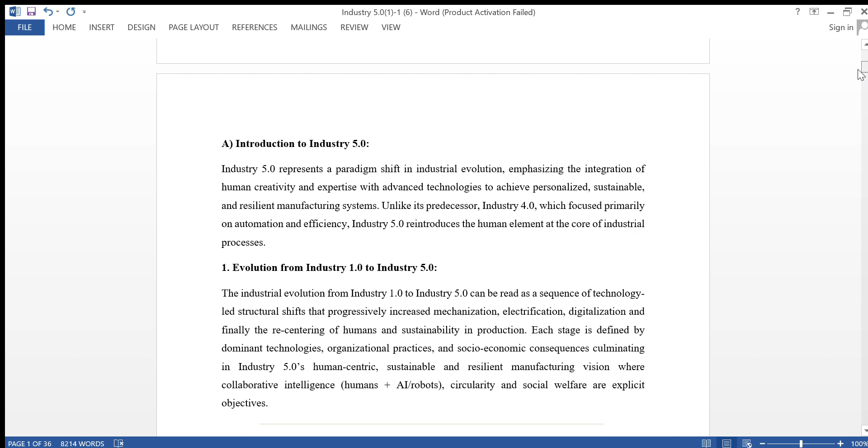What is Introduction to Industry 5.0? Industry 5.0 represents a paradigm shift in industrial evolution, emphasizing the integration of human creativity and expertise with advanced technologies to achieve personalized, sustainable, and resilient manufacturing systems. Unlike its predecessor, Industry 4.0, which focused primarily on automation and efficiency, Industry 5.0 reintroduces the human element at the core of industrial processes.

Evolution from Industry 1.0 to Industry 5.0. The industrial evolution from Industry 1.0 to Industry 5.0 can be read as a sequence of technology-led structural shifts that progressively increased mechanization, electrification, digitalization, and finally the recentering of human and sustainability in production. Each stage is defined by dominant technologies, organizational practices, and socio-economic consequences, culminating in Industry 5.0, a human-centric, sustainable, and resilient manufacturing vision where collaborative intelligence, circularity, and social welfare are explicit objectives.

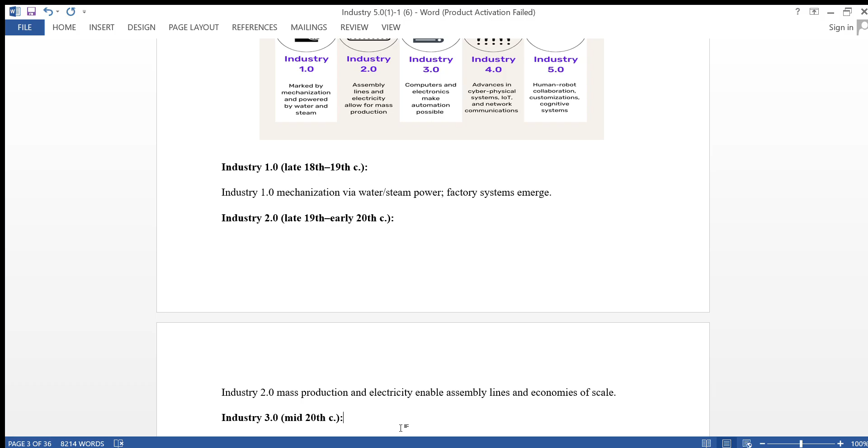Here are the differences from Industry 1.0 to Industry 5.0. Industry 1.0 includes mechanization via water or steam power; the factory system emerges. Industry 2.0 includes mass production, and electricity enables assembly lines and economies of scale. Industry 3.0 brings electronics and programmable logic controllers, bringing automation and digital control.

Industry 4.0: cyber-physical systems (CPS), Internet of Things, big data, cloud computing, and AI enable highly interconnected, data-driven smart factories and value chains. The emphasis is on efficiency, flexibility, and automation.

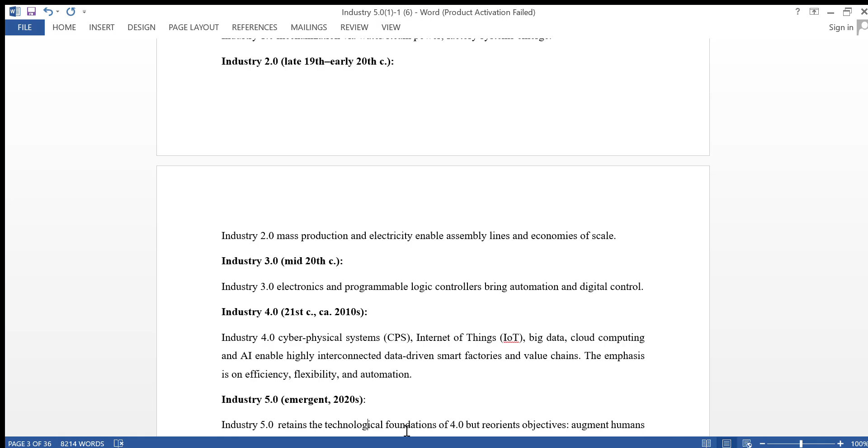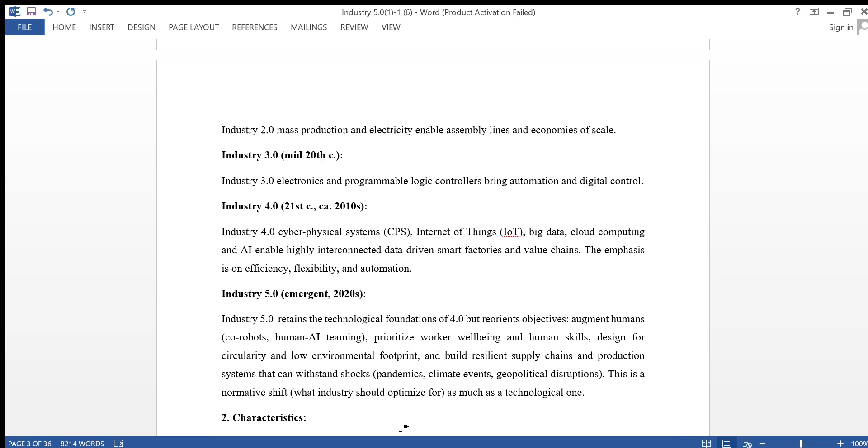Industry 5.0 retains the technological foundation of 4.0 but reorients objectives: augmented humans, prioritizing workers' well-being and human skills; designed for circularity and low environmental footprint; and built resilient supply chains and production systems that can withstand shocks. This is a normative shift as well as a technological one.

Characteristics: Human-centric collaboration. Industry 5.0 promotes a symbiotic relationship between humans and machines, where advanced robotics and AI collaborate with workers to enhance creativity and decision making in the production environment. Sustainability and resilience: the framework emphasizes environmental sustainability and system resilience, integrating technologies like green computing and renewable energy sources to reduce ecological footprint and enhance adaptability in the manufacturing process.

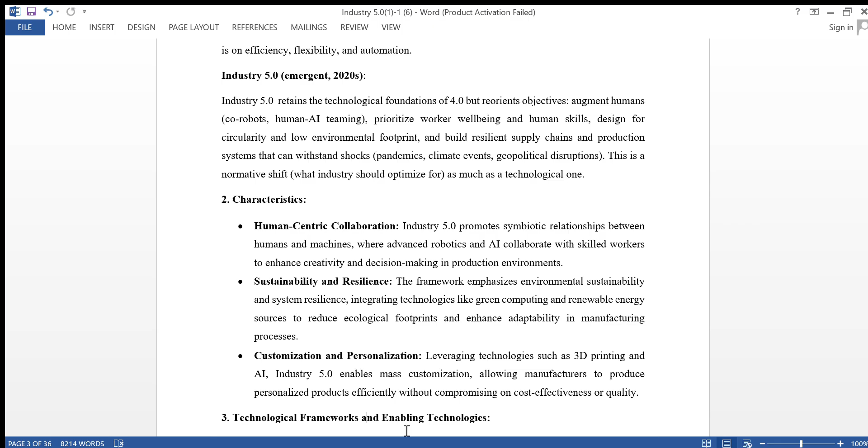Customization and personalization. Leveraging technologies such as 3D printing and AI, Industry 5.0 enables mass customization, allowing manufacturers to produce personalized products efficiently without compromising on cost effectiveness or quality.

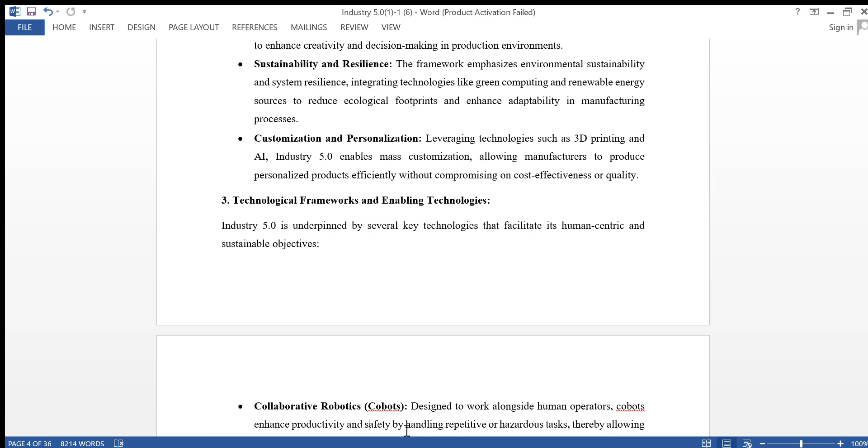Technological framework and enabling technologies. Industry 5.0 is underpinned by several key technologies that facilitate its human-centric and sustainable objectives. Collaborative robots, designed to work alongside human operators, enhance productivity and safety by handling repetitive or hazardous tasks, thereby allowing humans to focus on complex and creative aspects of production.

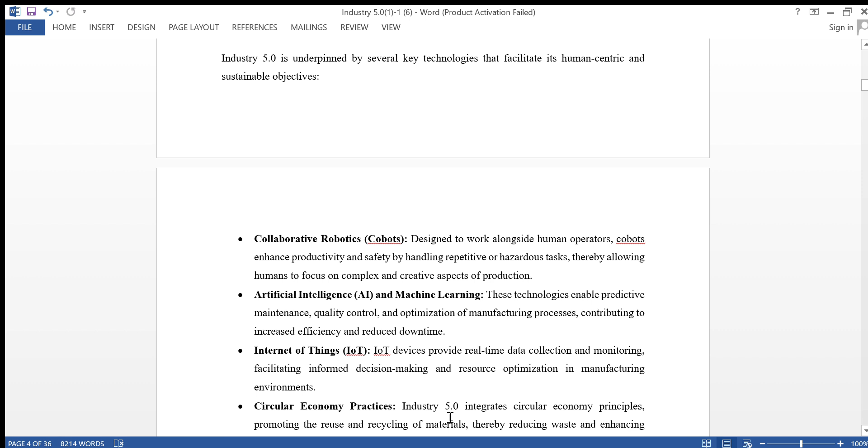Artificial intelligence and machine learning: these technologies enable predictive maintenance, quality control, and optimization of manufacturing processes, contributing to increased efficiency and reduced downtime. Internet of Things (IoT) devices provide real-time data collection and monitoring, facilitating informed decision making and resource optimization in manufacturing environments.

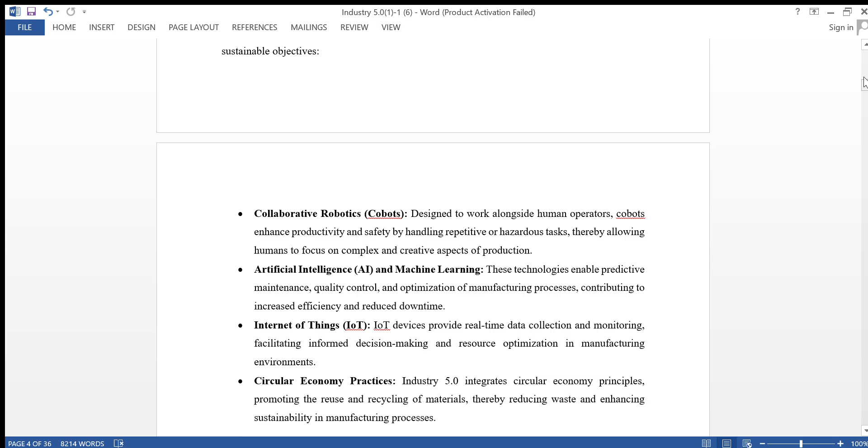Circular economy practices: Industry 5.0 integrates circular economy principles, promoting the reuse and recycling of materials, thereby reducing waste and enhancing sustainability in manufacturing processes. Next, our point is Industry 5.0.

Industry 5.0 differs technically from Industry 4.0. Optimization objective: Industry 4.0 optimizes throughput, agility, and cost. Industry 5.0 optimizes a multi-objective function that includes human well-being, sustainability, and supply chain resilience in addition to productivity. This requires multi-criteria decision frameworks and new KPIs.

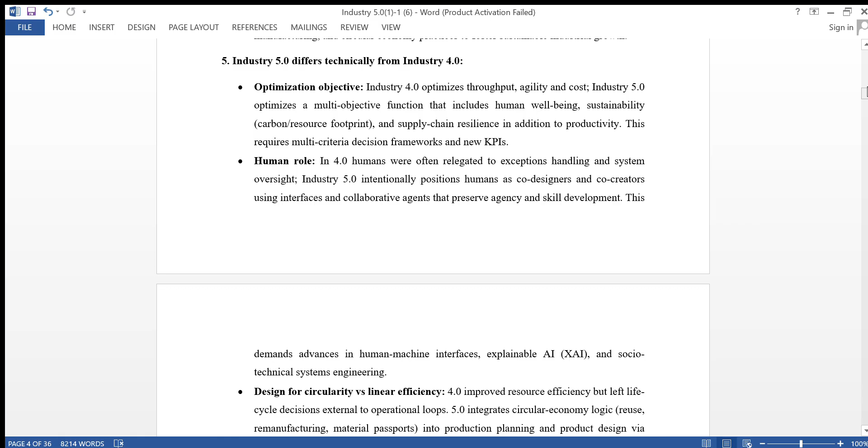Human role: in 4.0, humans were often relegated to exception handling and system oversight. Industry 5.0 intentionally positions humans as co-designers and co-creators, using interfaces and collaborative agents that preserve agency and skill development. This demands advances in human-machine interfaces, explainable AI (XAI), and socio-technical system engineering.

Design for circularity versus linear efficiency. Industry 4.0 improved resource efficiency but left life cycle decisions external to operational loops. Industry 5.0 integrates circular economy logic—reuse, remanufacturing, material passports—into production planning and product design via digital twin and traceability systems. Metrics and governance: Industry 5.0 requires new measurement systems and governance for ethical deployment of AI and robotics, areas underdeveloped in 4.0. Standards and policy instruments are emerging to fill that gap.

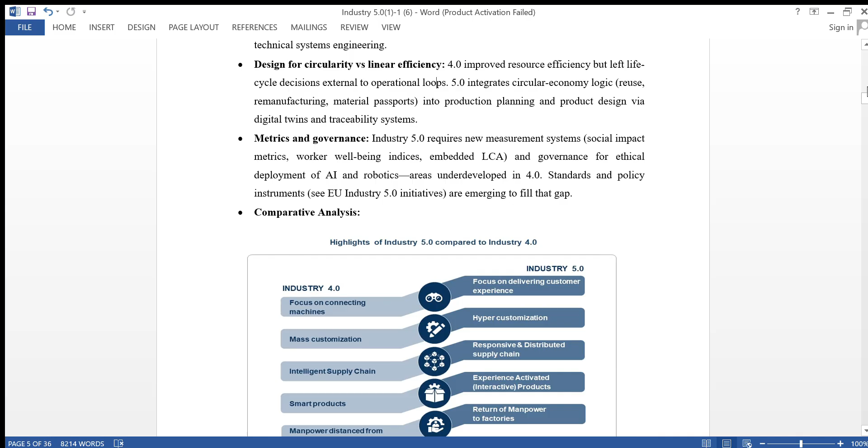Here are the comparative analysis for Industry 4.0 and Industry 5.0 in tabular form and also in picture form. Core principles of Industry 5.0.

Industry 5.0, or I 5.0, is the socio-technical evolution that layers three primary aims—human-centeredness, sustainability, and resilience or flexibility—on top of the digital automation groundwork laid by Industry 4.0. The three pillars of Industry 5.0 are shown in this picture: people-centeredness, resilience, and sustainability. Human-centric approach.

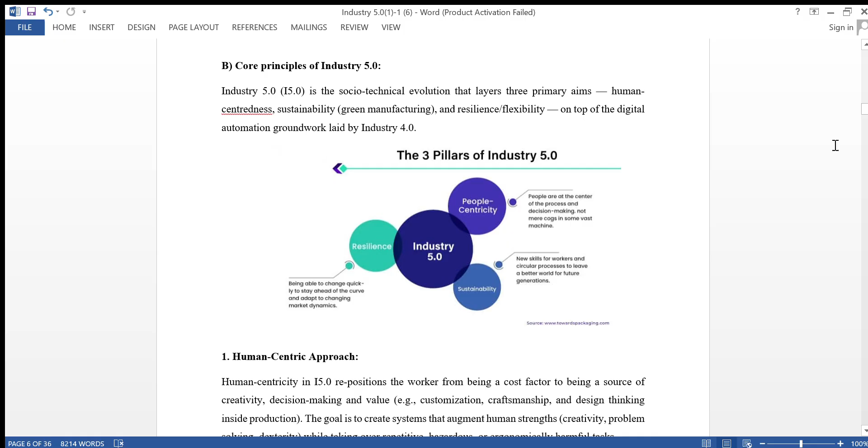Human-centric in Industry 5.0 is repositioning workers from being a cost factor to being a source of creativity, decision making, and value. The goal is to create systems that augment human strength while taking over repetitive, hazardous, or ergonomically harmful tasks. Practical element:

Augmentation over automation. Design workstations and software that amplify human judgment, for example AR or HMI overlays, assistive keyboards, and design supportive systems. Skill and upskilling: continuous learning pathways and on-the-job training integrated with production systems.

Digital twin for training and adaptive tutoring. Ergonomic and well-being metrics: sensorized workplace and human digital twin to monitor load, posture, and cognitive stress, enabling real-time adjustment to tasks and schedules.

Why it matters? Because worker involvement improves system adaptability and reduces brittle automation failure modes. Because humans apply contextual reasoning that current AI or automation struggle with.

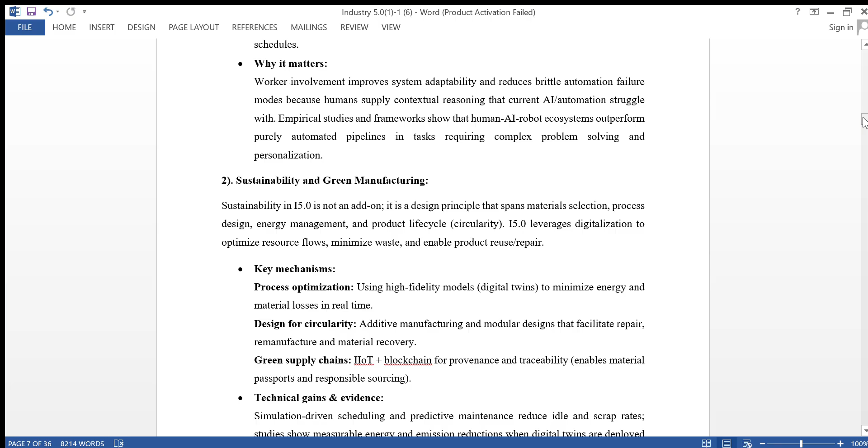Empirical studies and frameworks show that human-AI-robot ecosystems outperform purely automated pipelines in tasks requiring complex problem solving and personalization. Sustainability and green manufacturing. Sustainability in Industry 5.0 is not an add-on; it is a design principle that spans material selection, process design, energy management, and product lifecycle.

Industry 5.0 leverages digitalization to optimize resource flow, minimize waste, and enable product reuse or repair. Key mechanisms include process optimization using high fidelity models to minimize energy and material losses in real time, and design for circularity: additive manufacturing and modular design that facilitate repair, remanufacture, and material recovery.

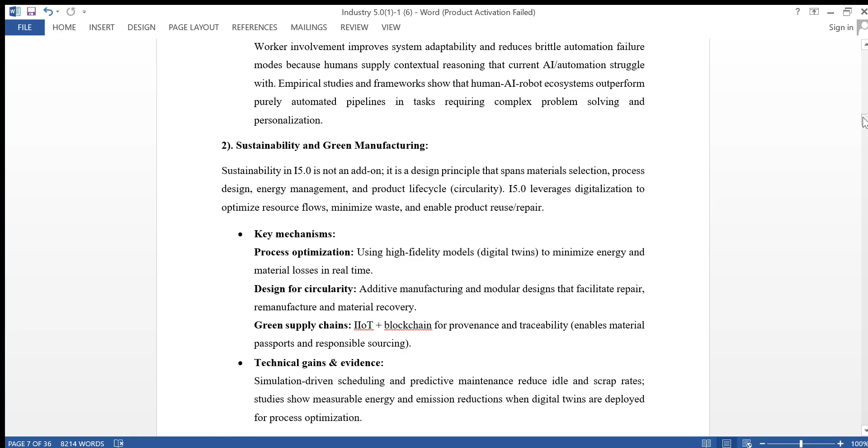Green supply chain: IIoT plus blockchain for provenance and traceability. Technical gains and evidence: simulation-driven scheduling and predictive maintenance reduce idle and scrap rates. Studies show measurable energy and emission reduction when digital twins are deployed for process optimization.

Next point is core technical approaches. Digital twin enabled what-if analysis: run high speed scenario simulations to evaluate alternative production routing and resource allocations during disruption. Decentralized decision nodes: edge computing plus human oversight so local units can continue operating when central servers or networks are unavailable. Reconfigurable cobot cells and modular tooling: hardware designed for rapid reprogramming and redeployment to alternate tasks.

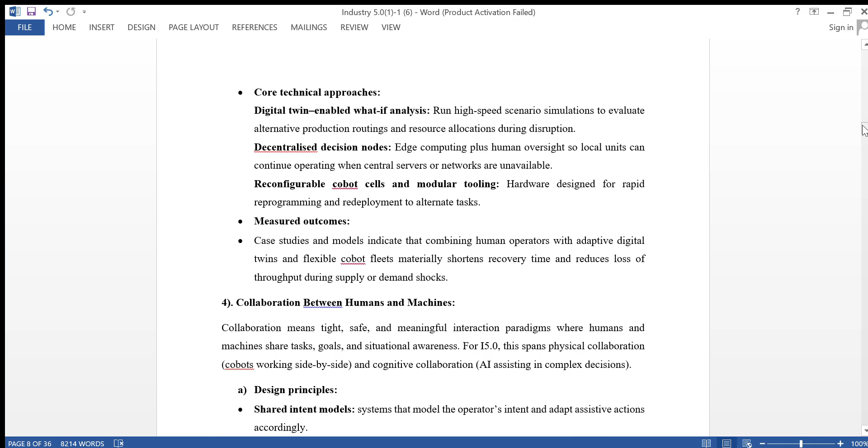Measured outcomes: case studies and models indicate that combining human operators with adaptive digital twins and flexible cobot fleets shortens recovery time and reduces loss of throughput during supply or demand shocks.

Next point is collaboration between humans and machines. Collaboration means a tight, safe, and meaningful interaction paradigm where human and machine share tasks, goals, and situational awareness. For Industry 5.0, this spans physical collaboration and cognitive collaboration.

Design principle: shared intent models—systems that model the operator's intent and adapt assistive actions accordingly. Transparent AI: explanation, confidence scores, and human-in-the-loop overrides.

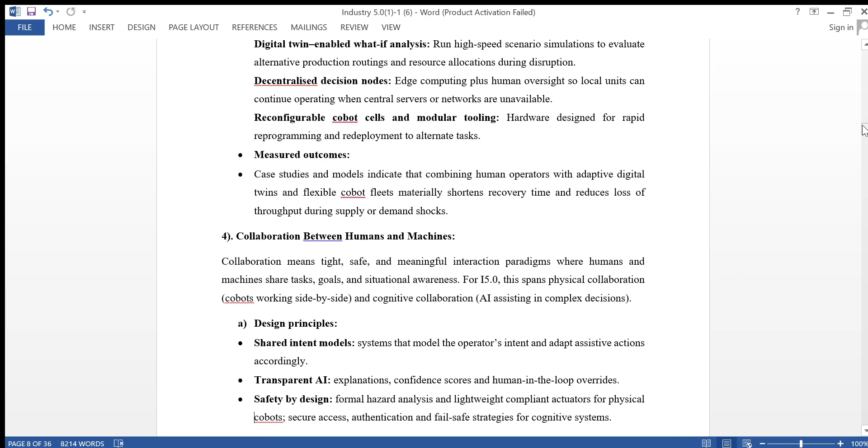Safety by design: formal hazard analysis and lightweight compliant actuators for physical cobots, secure access authentication, and fail-safe strategies for cognitive systems. Next point is

enabling technologies of Industry 5.0. Industry 5.0 emphasizes human-machine collaboration, not replacement, personalized and socially sustainable value creation, circularity and reduced environmental impact, and production systems that can quickly adapt and recover from disruption.

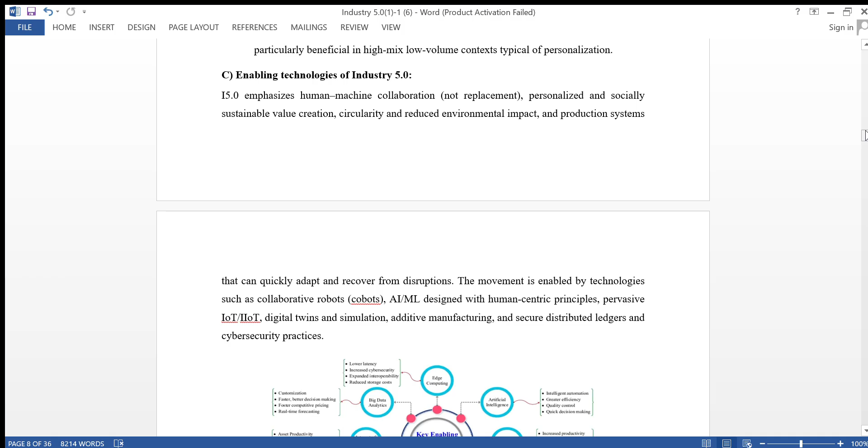Here you can see in the picture key enabling technologies are artificial intelligence, cobots, 6G and beyond, digital twin, blockchain, IoT, big data, etc.

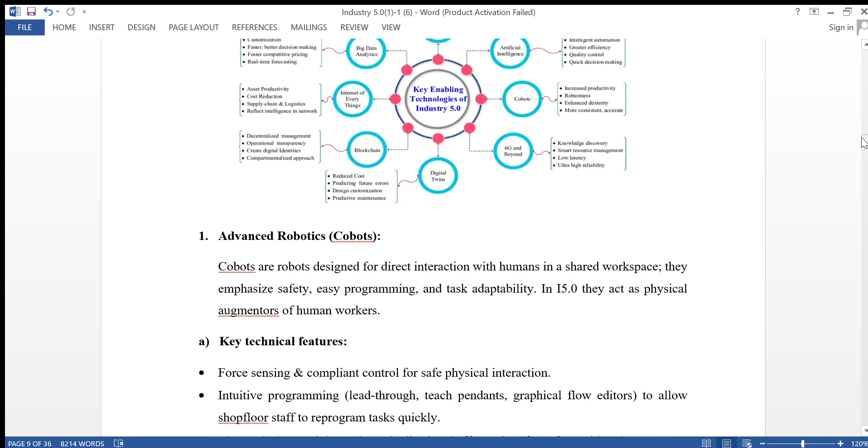Next point is advanced robotics. Advanced robotics, cobots are robots designed for direct interaction with humans in a shared workspace. They emphasize safety, easy programming, and task adaptability. In Industry 5.0, they act as physical augmentors of human workers.

Key technical features: force sensing and compliant control for safe physical interaction, intuitive programming to allow shop floor staff to reprogram tasks quickly, plug and play modules, and standardized end-effector interfaces for rapid tool swap.

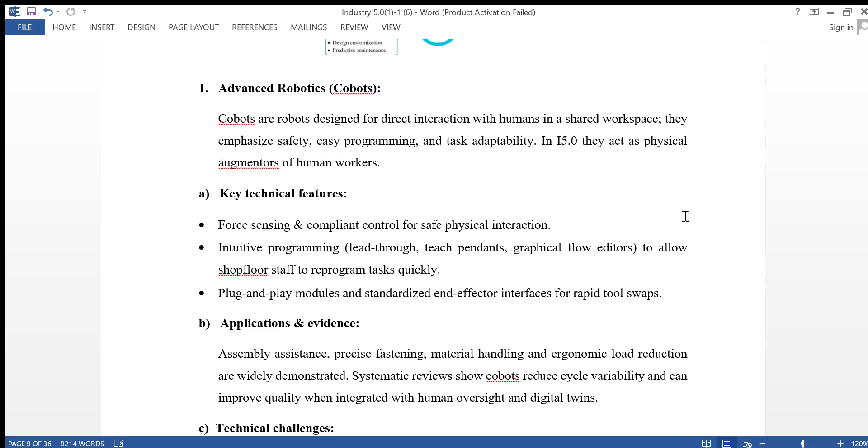Application and evidence: assembly assistance, precise fastening, material handling, and ergonomic load reduction are widely demonstrated. Systematic reviews show cobots reduce cycle variability and can improve quality when integrated with human oversight and digital twin.

Artificial intelligence and machine learning, AI or ML, provide predictive maintenance, quality inspection, process optimization, adaptive scheduling, and decision support. In Industry 5.0, the emphasis shifts to human-centered AI.

Technical priorities for Industry 5.0 include interpretable models where operators can inspect and correct suggestions, human-in-the-loop learning for continual model improvement using operator feedback and edge retraining, and safe constraint optimization that respects environmental and ergonomic constraints. Representative results include AI driven visual inspections.

Inspection systems coupled with cobots reduce defect escape rates. Reinforcement learning can adapt robot control policies to human collaborators' timing, if trained with safety constraints.

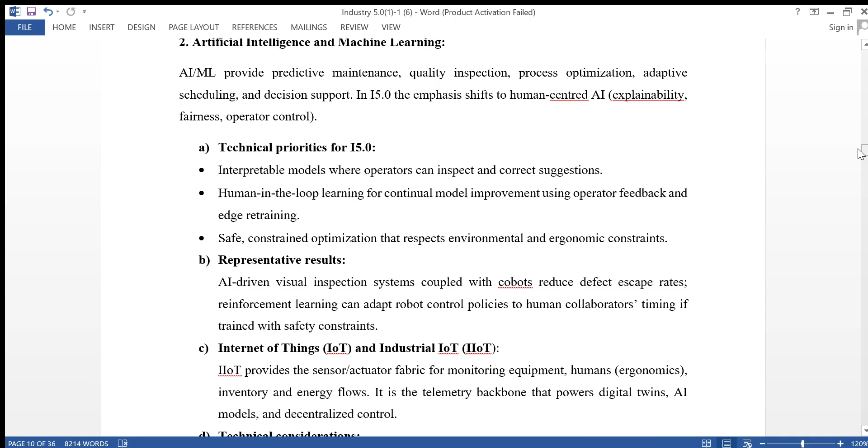Internet of Things and Industrial Internet of Things, or IIoT, provide the sensor and actuator fabric for monitoring equipment, human, inventory, and energy flows. It is the telemetry backbone that powers digital twin AI models and decentralized controls.

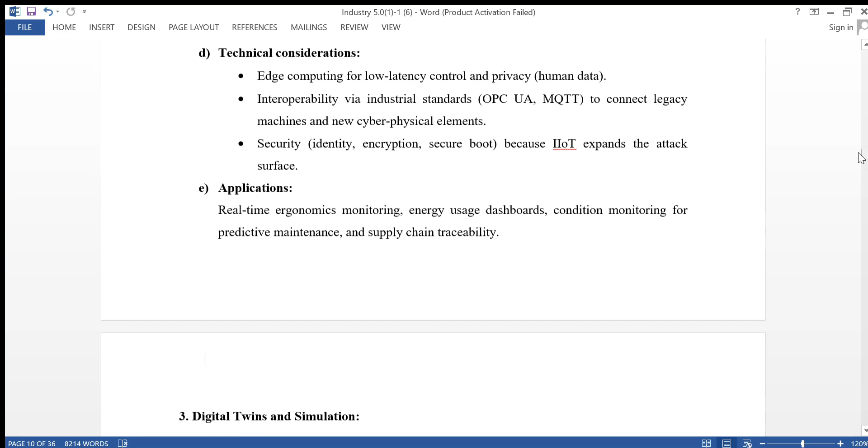Technical considerations include edge computing for low latency control and privacy, interoperability via industrial standards to connect legacy machines and new cyber-physical elements, and security, because IIoT expands the attack surface. Applications include real-time ergonomic monitoring, energy usage dashboards, condition monitoring for predictive maintenance, and supply chain traceability.

Third point is digital twins and simulation. Digital twins are high fidelity, real-time virtual counterparts of physical assets, processes, and even human operators. In Industry 5.0, they are used for operator training, scenario planning, ergonomics evaluation, and sustainability optimization.

Technical stack: multi-physics models integrated with real-time sensor feeds, co-simulation frameworks that allow physics simulators, control code, and human behavior models to run together, and human digital twins to model fatigue, posture, and decision tendencies so interfaces can adapt.

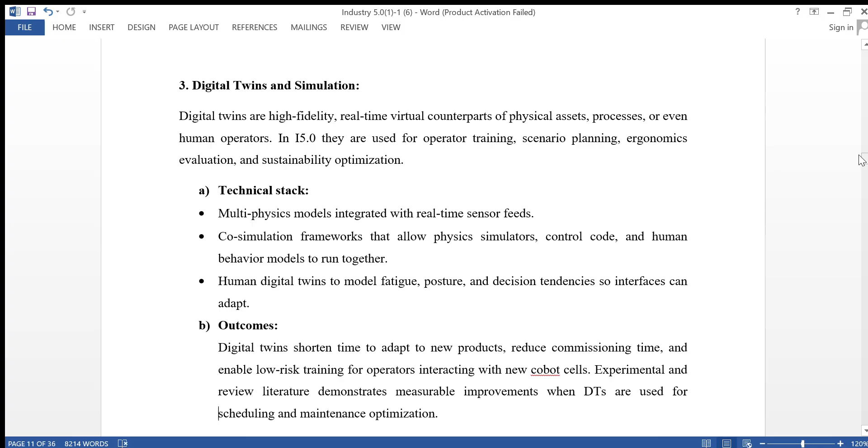Outcomes: digital twins can shorten time to adapt to new products, reduce commissioning time, and enable low-risk training for operators interacting with new cobot cells. Experimental and review literature demonstrate measurable improvement when digital twins are used for scheduling, maintenance, and optimization.

Challenges include qualification for safety-critical components, repeatability across printers, and lifecycle assessment of materials, which remain active research areas. Integration with digital twins in process monitoring is a common solution path.

Blockchain and cybersecurity: blockchain can provide immutable provenance records, useful for sustainability claims and complex supply chains. Cybersecurity is essential because integrated human-machine systems need confidentiality, integrity, and availability guarantees.

Technical trade-off: permissioned ledgers are typically chosen for industrial use to control read-write access and reduce energy cost. Complementary measures include hardware root of trust, secure firmware update channels, zero trust architectures, and anomaly detection using IIoT telemetry.

Demonstrated use: pilot projects show traceable material passports for high value components and smart contracts coordinating cross-firm workflows. However, integration and scalability across legacy systems are non-trivial.

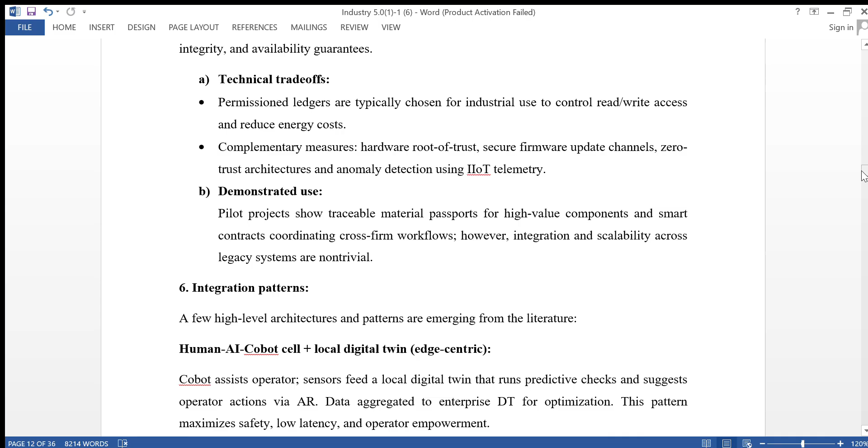Integration patterns: a few key architectures emerging from the literature are given below. The human-AI-cobot cell plus local digital twin pattern has the cobot assist the operator, with sensor feeds to a local digital twin that runs predictive checks and suggests operator actions via AR. Data is aggregated to an enterprise digital twin for optimization. This pattern maximizes safety, low latency, and operator empowerment.

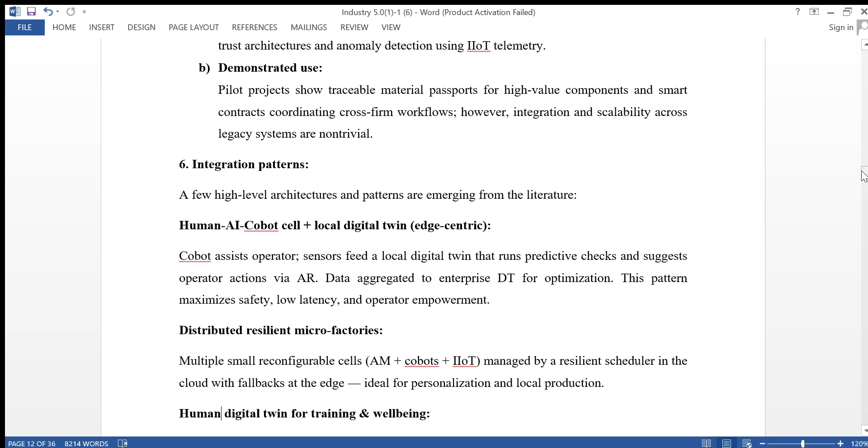For example, distributed resilient microfactories use multiple small reconfigurable cells managed by a resilient scheduler in the cloud with fallback at the edge, ideal for personalization and local production.

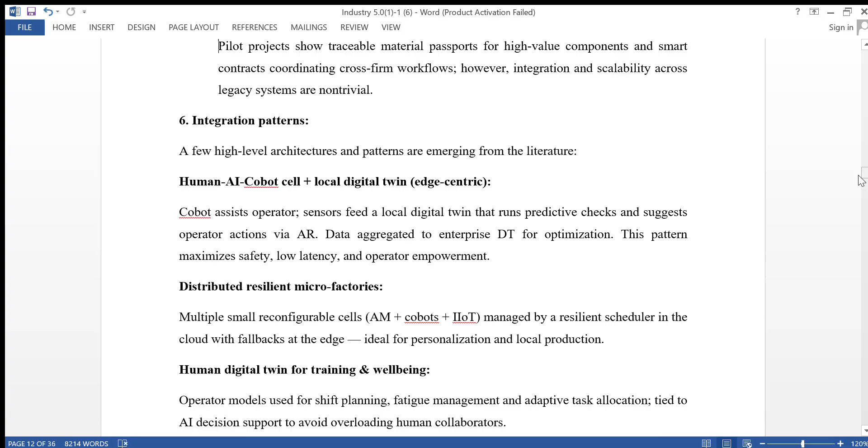Human digital twins for training and well-being: operator models are used for shift planning, fatigue management, and adaptive task allocation, tied to AI decision support to prevent overloading human collaborators.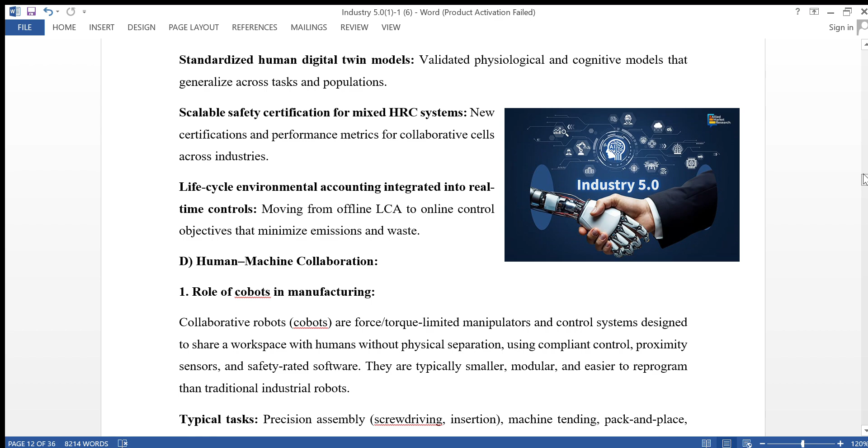Next point is trustworthy AI at the edge: balancing model complexity with interpretability for operators, standardized human digital twin models, validated physiological and cognitive models that generalize across tasks and populations, and scalability with safety certification for mixed human-robot collaboration systems.

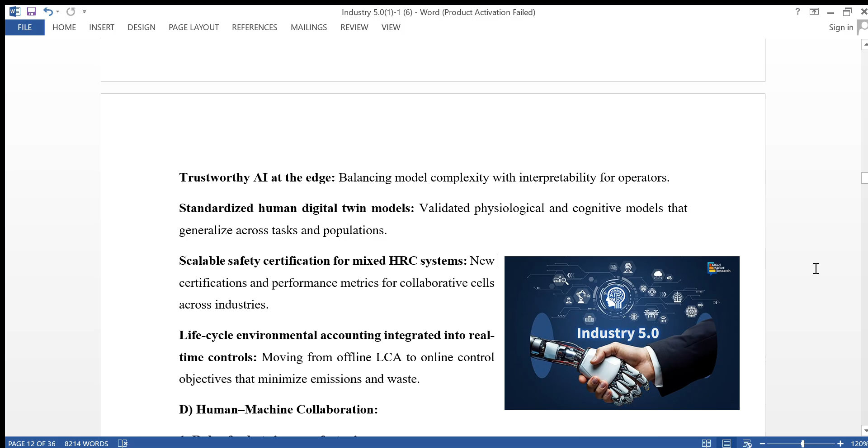New certifications and performance metrics are needed for collaborative cells across industries. Lifecycle environmental accounting integrated into real-time controls is moving from offline LCA to online control objectives that minimize emissions and waste.

This is the relation between collaboration of human and AI technology or robots, cobots, as we call them. Next point is human-machine collaboration.

Role of cobots in manufacturing: collaborative robots, or cobots, are force or torque limited manipulators and control systems designed to share a workspace with humans without physical separation, using compliant control, proximity sensors, and safety-rated software. They are typically smaller, modular, and easier to reprogram than traditional industrial robots.

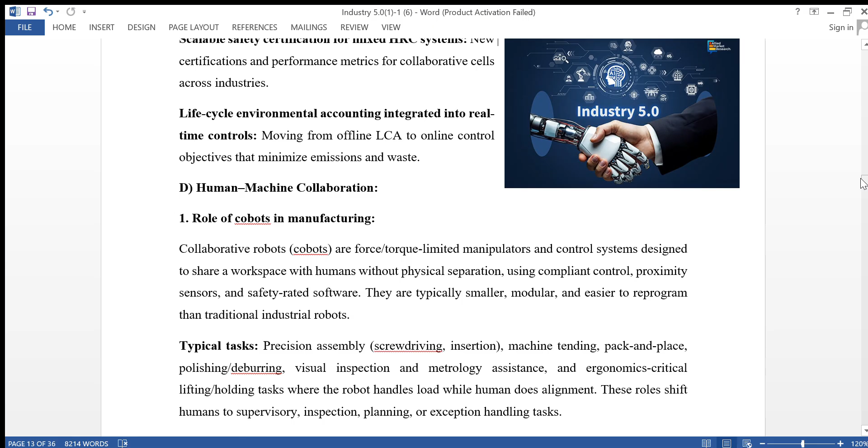Typical tasks include precision assembly or screw driving insertion, machine tending, pack and place, polishing, deburring, visual inspection and metrology assistance, and ergonomic critical lifting or holding tasks where the robot handles the load while the human does alignment. These roles shift humans to supervisory, inspection, planning, or exception task handling.

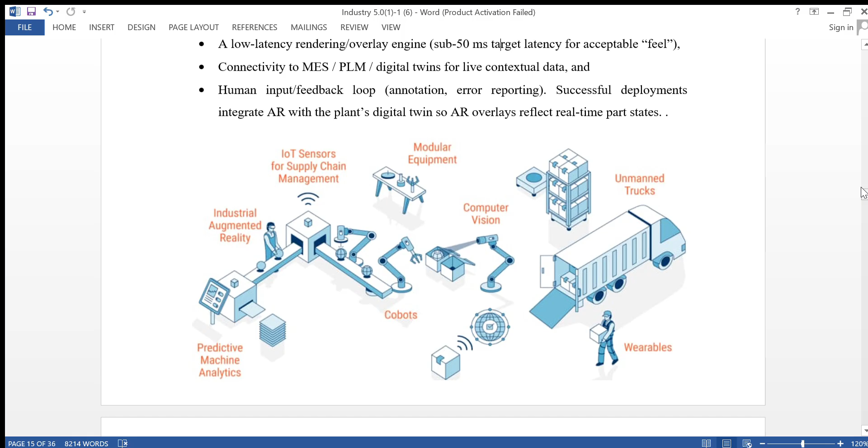Augmented reality and virtual reality assistance: AR is primarily used for contextual step-by-step work instructions, guided assembly, remote expert support, and visual quality inspection overlays. VR is used mainly for immersive training, layout validation, and ergonomic simulation.

Technical approach and architecture: modern AR systems in manufacturing typically combine a pose estimation pipeline, a low latency rendering overlay engine, connectivity to MES, PLM, or digital twin for live contextual data, and a human input or feedback loop.

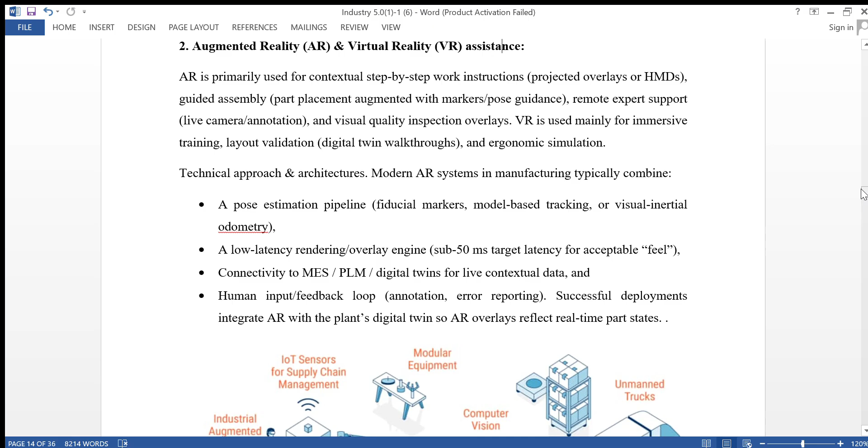Successful deployments integrate AR with the plant digital twin, so AR overlays reflect real-time part states.

Mechanism: workload reallocation plus feedback loops by automating rote calculation, search, and constraint checking. This frees human attention for higher cognitive tasks. Additionally, continuous feedback from AI driven analytics improves decision precision by surfacing edge cases and trade-offs rapidly.

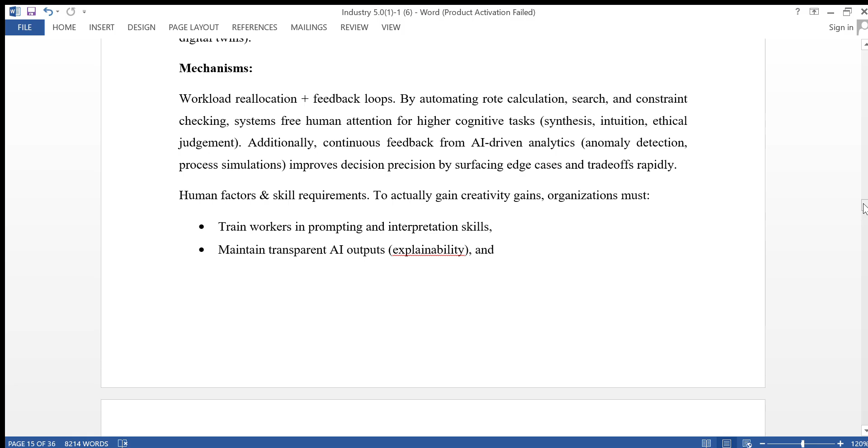Human factors and skill requirements are needed to actually gain creativity gains. Organizations must train workers in prompting and interpreting skills, maintain transparent AI output explainability, and provide psychological safety so workers treat AI output as an aid rather than a threat. Studies show creativity gains only when workers have autonomy and understand the tool's limitations.

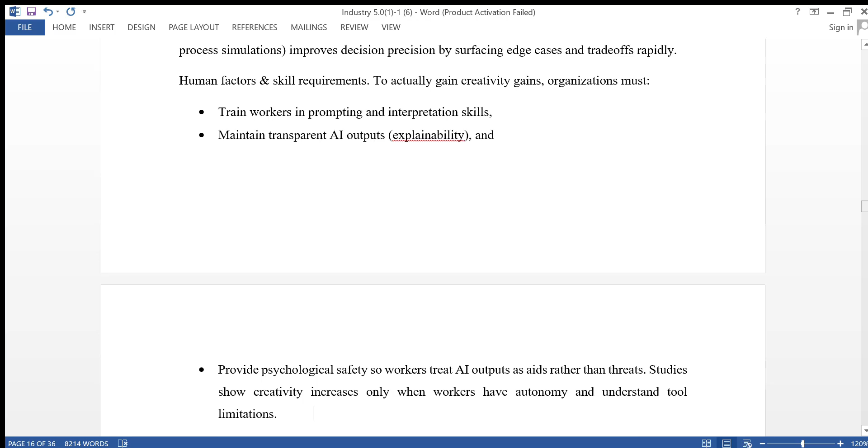Next, our point is risk: over-reliance leading to skill erosion, biased or brittle AI suggestions, and increased surveillance leading to reduced motivation. Mitigation includes regular human-led design review, red team testing of AI suggestions, and policies that preserve autonomy and privacy. AI aids creativity when human autonomy and training are present.

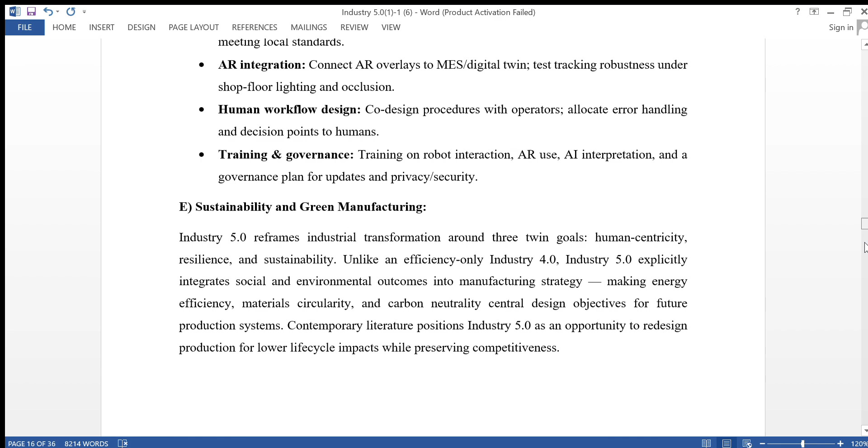Empirical study shows a positive effect on creativity and decision quality only when humans operate, retain autonomy, and have training in using AI tools. Engineering and deployment checklist: pilot a cell by choosing a mid-complexity assembly task, measure baseline KPIs, cycle time, defects, and ergonomics.

Next, our point is applications across industries. Automotive and aerospace sectors are prime targets for Industry 5.0 because they combine complex supply chains, high energy and material intensity, and strong innovation capacity.

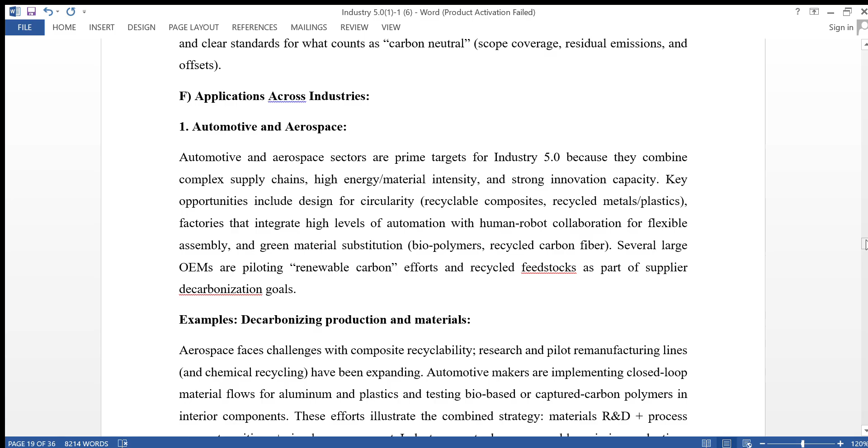Key opportunities include design for circularity, factories that integrate high levels of automation with human-robot collaboration for flexible assembly, and green material substitution. Several large OEMs are piloting renewable carbon efforts and recycled feedstock as part of supplier decarbonization goals. Example: decarbonization of production and materials.

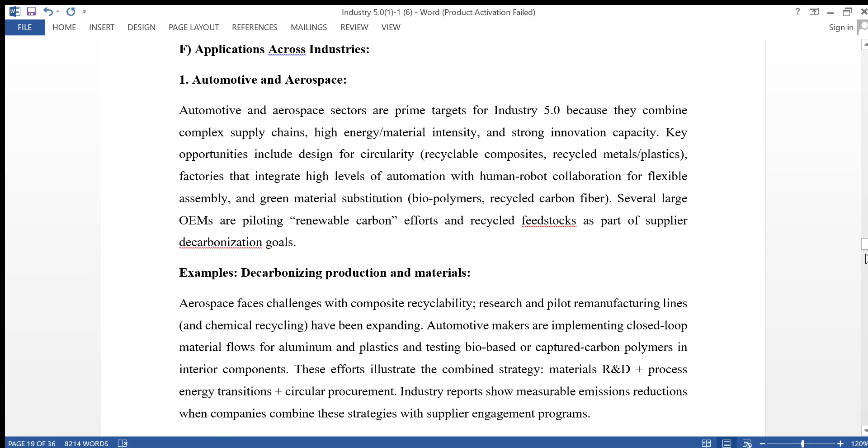Aerospace faces challenges with composite recyclability, and research and pilot remanufacturing lines have been expanding. Automotive makers are implementing closed-loop material flows for aluminum and plastic, and testing bio-based or captured-carbon polymers in interior components. These efforts illustrate the combined strategy of material R&D plus process energy transitions and circular procurement. Industry reports show measurable emission reduction when companies combine these strategies with supplier engagement programs.

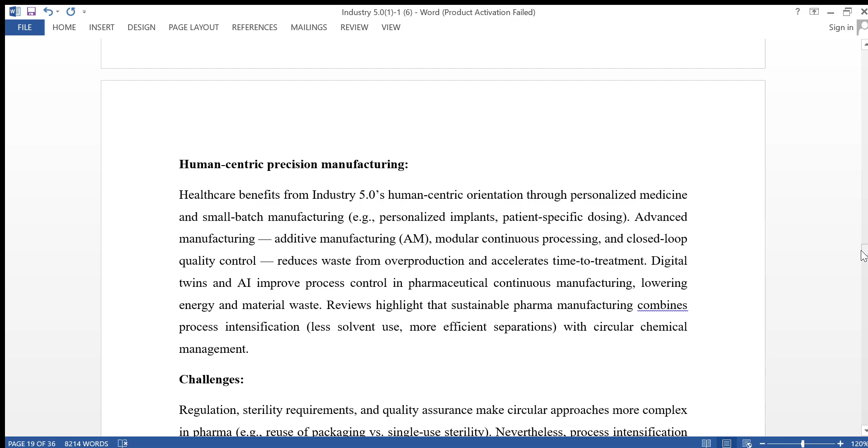Next point is industrial human-centric precision manufacturing. Healthcare benefits from Industry 5.0's human-centric orientation through personalized medicine and small batch manufacturing, advanced manufacturing, additive manufacturing, modular continuous processing, and closed-loop quality control, which reduces waste from overproduction and accelerates time to treatment. Digital twins and AI improve process control in pharmaceutical continuous manufacturing, lowering energy and material waste.

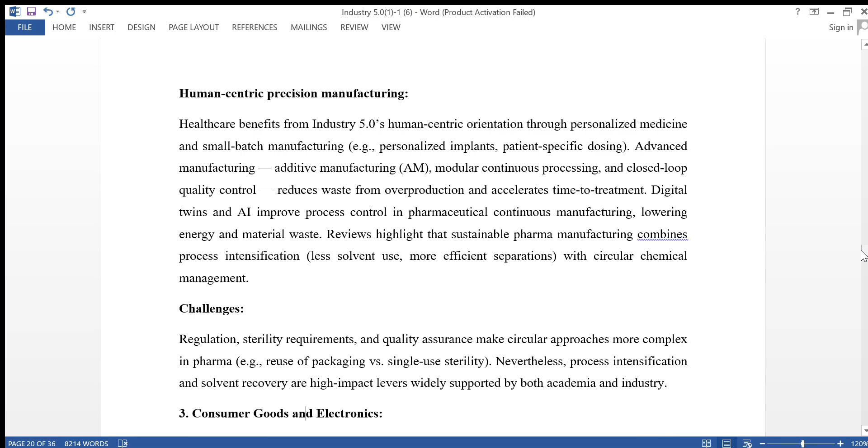Reviews highlight that sustainable manufacturing combined with circular chemical management faces challenges: regulations, sterility requirements, and quality assurance make circular approaches more complex in pharma. Nevertheless, process intensification and solvent recovery are high-impact levers widely supported by both academia and industry.

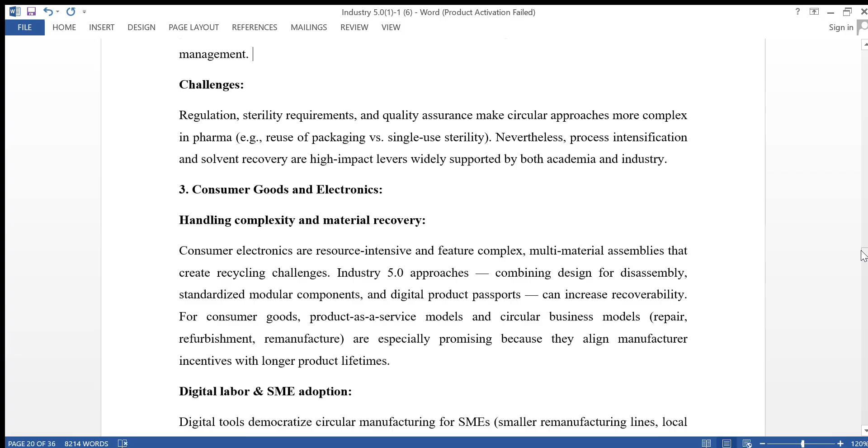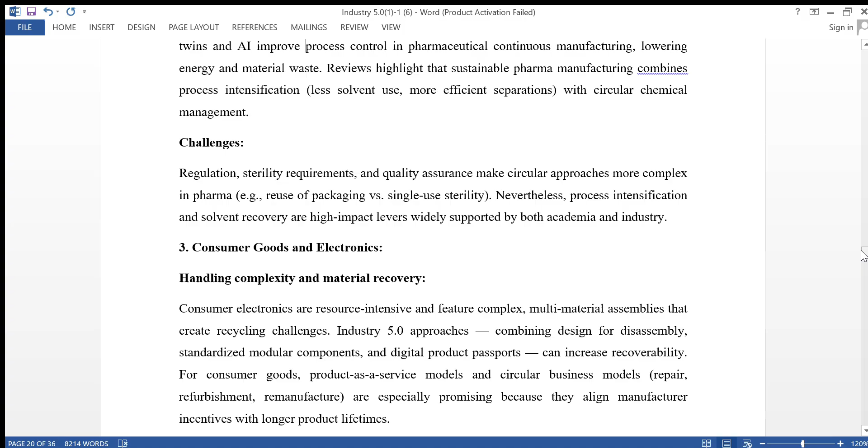Consumer goods and electronics: handling complexity and material recovery. Consumer electronics are resource intensive and feature complex multi-material assemblies that create recycling challenges. Industry 5.0 approaches combining design for disassembly, standardized and modular components, and digital product passports can increase recoverability for consumer goods. Product-as-a-service models and circular business models are especially promising because they align manufacturer incentives with longer product lifetimes.

Next, our point is smart cities and infrastructure integrated system thinking. Smart cities integrate buildings, transport, energy, and industrial zones, creating opportunities for industrial symbiosis. Industry 5.0 technologies allow factories to participate as active energy or circulation nodes in city systems, increasing resilience and reducing net urban emissions. The European Research Agenda and Smart City projects emphasize co-optimization across city sectors to unlock these benefits.

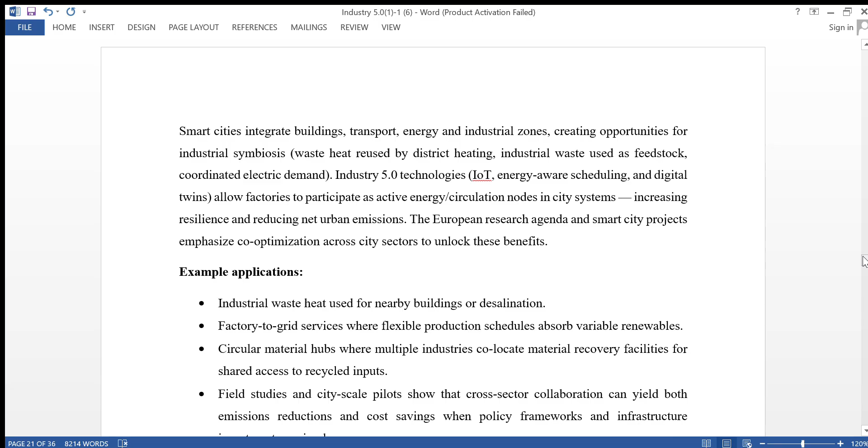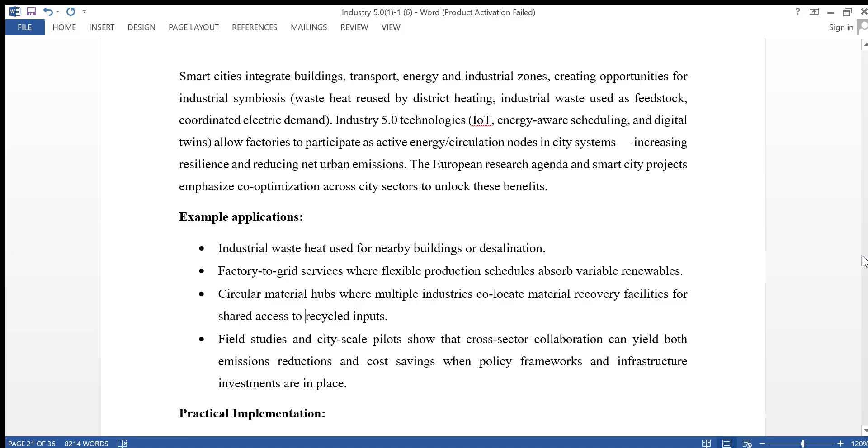Example applications: industrial waste heat used for nearby buildings or desalination, factory-to-grid services where flexible production schedules absorb variable renewables, and circular material hubs where multiple industries co-locate material recovery facilities to share access to recycled inputs. Field studies and city-scale pilots show that cross-sector collaboration can yield both emission reduction and cost savings when policy frameworks and infrastructure investment are in place.

Next point is challenges and barriers: high initial cost and ROI uncertainty. Transition to Industry 5.0 requires investment across multiple fronts: upgrading hardware, deploying industrial AI and digital twins, securing networks, and designing production for personalization and sustainability.

Capital expenditures are often concentrated earlier in the adoption cycle, while benefits such as higher customization, reduced waste, and improved product value accrue over time and are distributed unevenly across product lines and customers. As a result, small and medium-sized enterprises frequently face a high barrier to entry because they lack the scale and/or financing to absorb upfront costs and the managerial bandwidth to run a parallel legacy/modern systems.

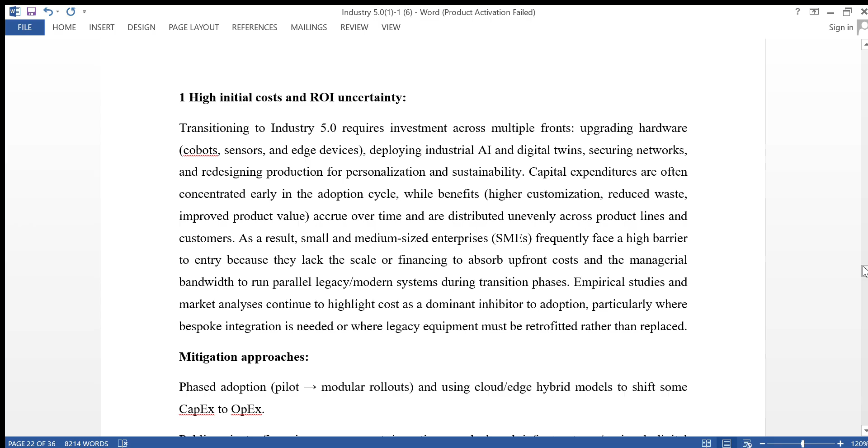During transition phases, empirical studies and market analysis continue to highlight cost as a dominant inhibitor to adoption, particularly where bespoke integration is needed or where legacy equipment must be retrofitted rather than replaced. Mitigation approaches include phased adoption, pilot-to-modular rollouts, and using cloud or edge hybrid models to shift some CAPEX to OPEX.

Cybersecurity risk and expanded attack surface: Industry 5.0 extends human-machine collaboration, interconnects devices at scale via IoT, and brings sensitive personal and operational data into workflows, increasing both the quality and quantity and sensitivity of data flow, creating large heterogeneous attack surfaces that include legacy OT systems.

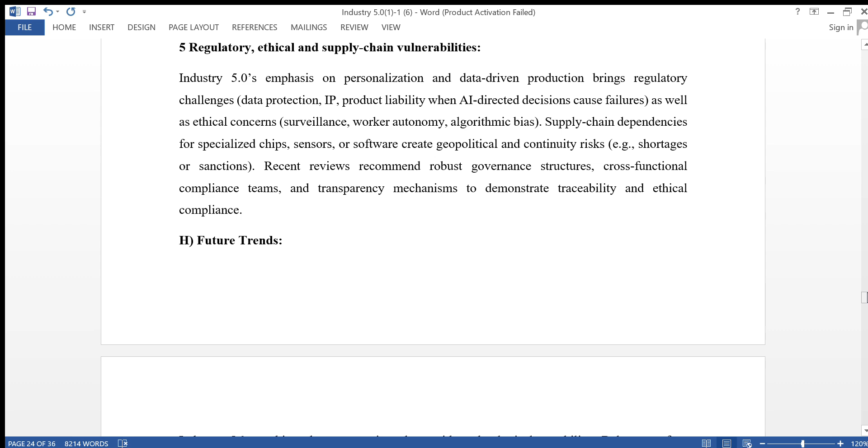Regulatory, ethical, and supply chain vulnerability: Industry 5.0's emphasis on personalization and data-driven production brings regulatory challenges as well as ethical concerns. Supply chain dependencies for specialized chips, sensors, or software create geopolitical and continuity risk. Recent reviews recommend robust governance structures, cross-functional compliance, and transparency mechanisms to demonstrate traceability and ethical compliance.

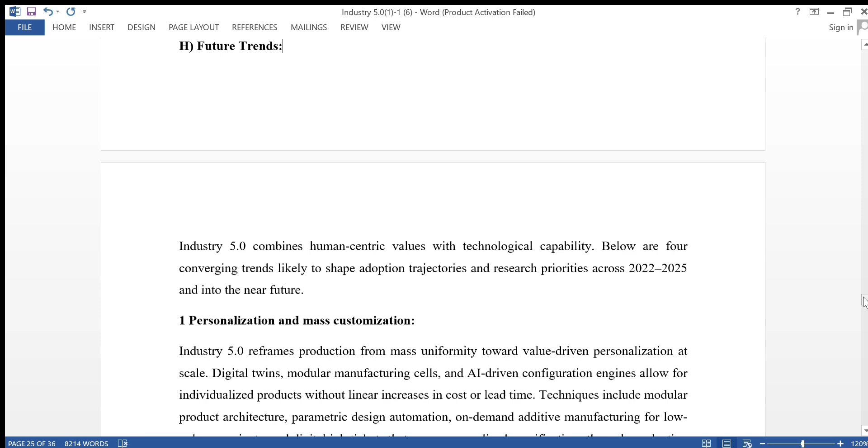Next point is future trends. Industry 5.0 combines human-centric values with technology capabilities. Below are four converging trends likely to shape adoption trajectories and research priorities across 2022, 2025, and into the near future: personalization and mass customization.

Industry 5.0 reframes production from mass uniformity toward value-driven personalization at scale. Digital twins, modular manufacturing cells, and AI-driven configuration engines allow for individualized products without a linear increase in cost or lead time. Techniques include modular product architecture, parametric design, automation, on-demand additive manufacturing for low-volume variants, and digital job tickets that carry personalized specifications through production and inspection.

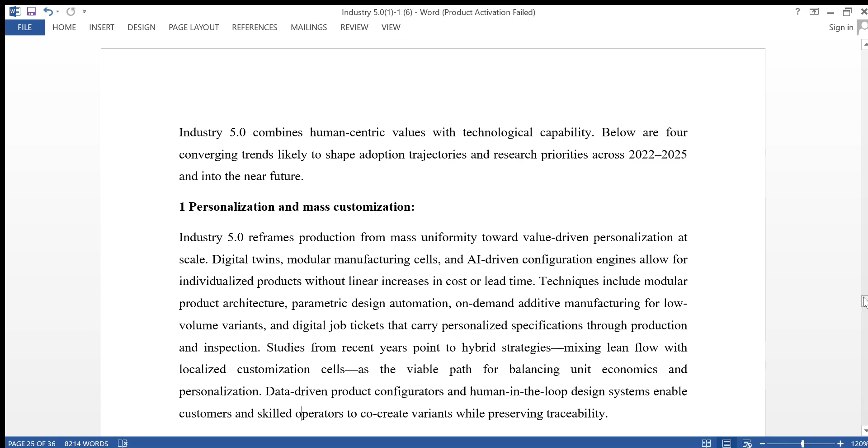Studies from recent years show that hybrid strategies mixing lean flow with localized customization cells are a viable path for balancing unit economics and personalization. Data-driven product configuration and human-in-the-loop design systems enable customers and skilled operators to co-create variants while preserving traceability.

This is the diagram for opportunities, limitations, and future trends or research of Industry 5.0.

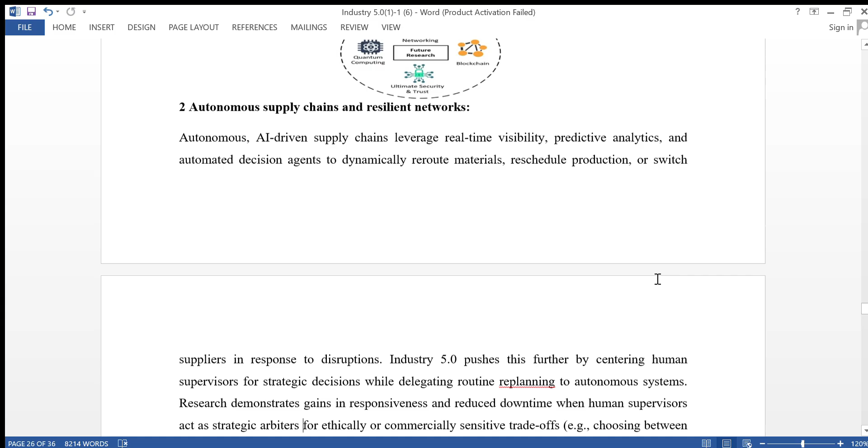Next point is autonomous supply chain and resilient networks. Autonomous AI-driven supply chains leverage real-time visibility, predictive analytics, and automated decision agents to dynamically reroute material, reschedule production, or switch suppliers in response to disruption.

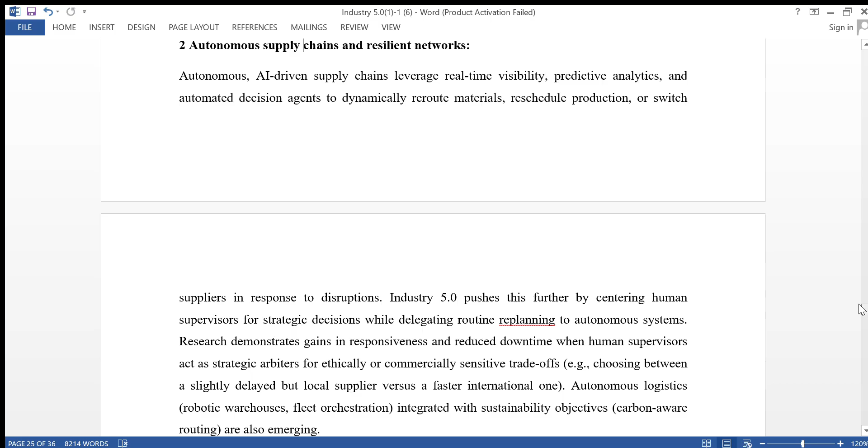Industry 5.0 pushes this further by centering human supervisors for strategic decisions while delegating routine replanning to autonomous systems. Research demonstrates gains in responsiveness and reduced downtime when human supervisors act as strategic arbiters for ethical or commercially sensitive trade-offs, for example choosing between a slightly delayed but local supplier versus a fast international one. Autonomous logistics integrated with sustainability objectives like carbon-aware routing are also emerging.

Next point is ethical AI explainability and responsible automation. As decision authority migrates to AI systems for personalization, scheduling, and quality control, explainability and ethical governance are becoming non-negotiable. Industry 5.0 explicitly places human welfare and values at the center. Therefore, these systems must be auditable, explainable, avoid discriminatory or unsafe decisions, and enable human-in-the-loop intervention.

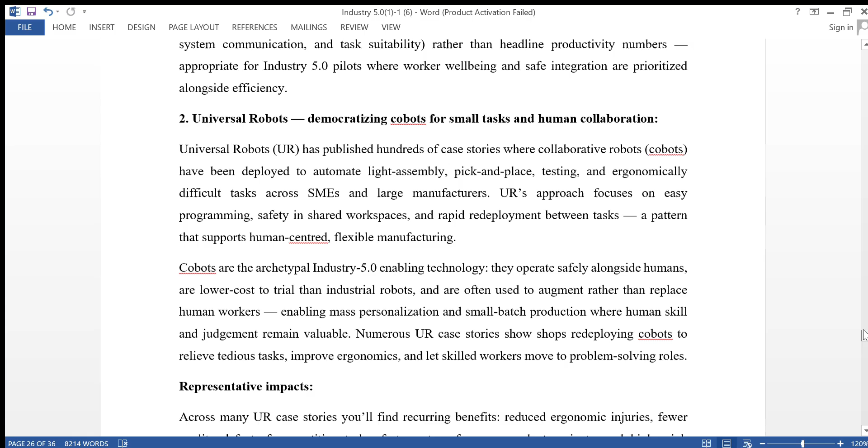Emerging work recommends multi-layered governance and model provenance tracking standards for explainability, and in operational contexts, dynamic consent for personalization data and impact assessments for AI-driven process changes. Recent academic reviews call for cross-disciplinary teams to co-design AI policies that are practical on the factory floor.

Universal Robots has published hundreds of case stories where collaborative robots have been deployed to automate light assembly, pick and place, testing, and ergonomically difficult tasks across SMEs and large manufacturers. Their approach focuses on easy programming, safety in shared workspaces, and rapid redeployment between tasks, a pattern of human-centered flexible manufacturing. Cobots are the archetypal Industry 5.0 enabling technology: they operate safely alongside humans, are lower cost to trial than industrial robots, and are often used to augment rather than replace human workers, enabling mass personalization and small batch production where human skills and judgment remain valuable.

Numerous case stories show shop floor redeployment of cobots to relieve tedious tasks, improve ergonomics, and let skilled workers move to problem-solving roles.

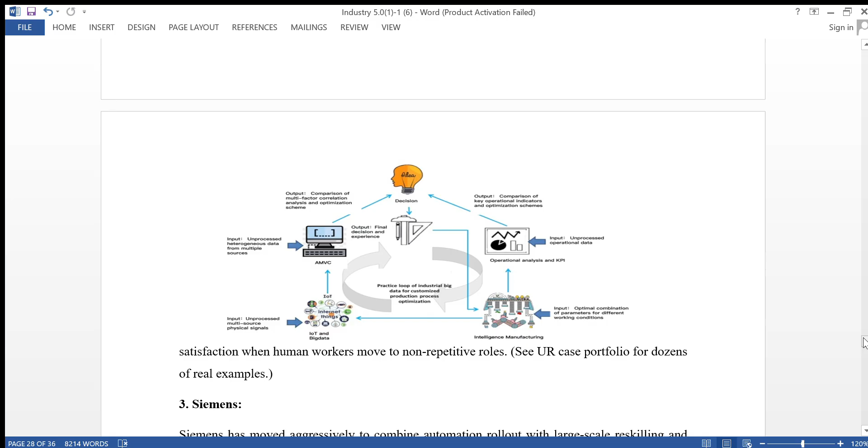Next, our point is here is the practice loop of industrial big data for customized production process optimization diagram.

Next point is Siemens. Siemens has moved aggressively to combine automation rollout with large-scale reskilling and people-centric learning programs. Public Siemens case material and internal learning descriptions document programs to upskill thousands of employees, deploy bottom-up digital learning, and embed people-centric design into automation adoption. Siemens also publishes case material showing how reskilling reduces resistance and creates internal capability to manage and scale automation safely. Industry 5.0 stresses that automation must be accompanied by workforce development.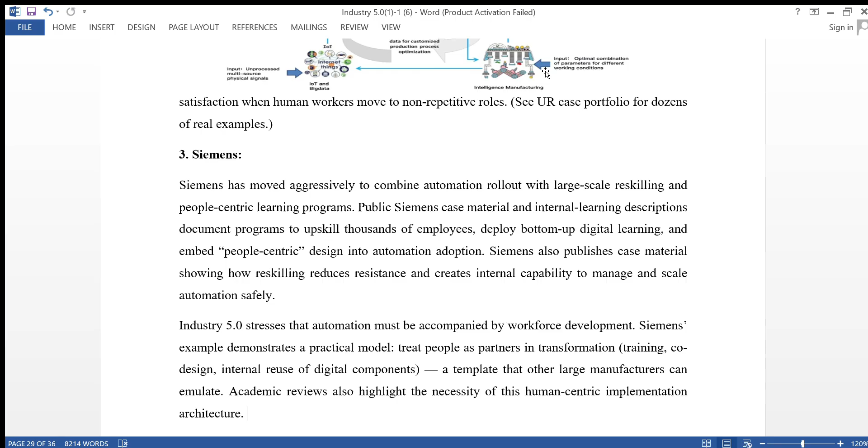The Siemens example demonstrates a practical model: treat people as partners in transformation, a template that other manufacturers can emulate. Academic reviews also highlight the necessity of this human-centric implementation architecture.

Philips Healthcare automation that frees clinicians for patient care. Philips has a documented project where AI and automation free clinicians from administrative tasks, speed image analysis, and enable remote assistance, delivering more time for direct patient care while improving throughput and diagnostic consistency.

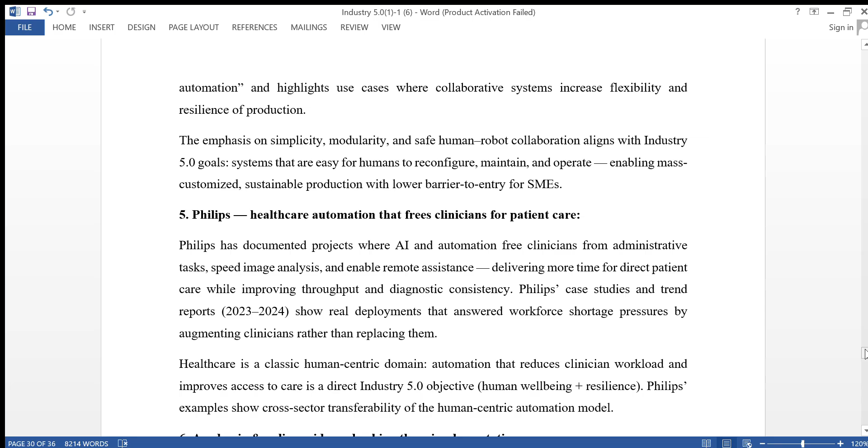Philips case study and trend report shows real deployments that answer workforce shortages by augmenting clinicians rather than replacing them. Healthcare is a classic human-centric domain. Automation reduces clinicians' workload and improves access to care, a direct Industry 5.0 objective. The Philips example shows cross-sector transferability of the human-centric automation model.

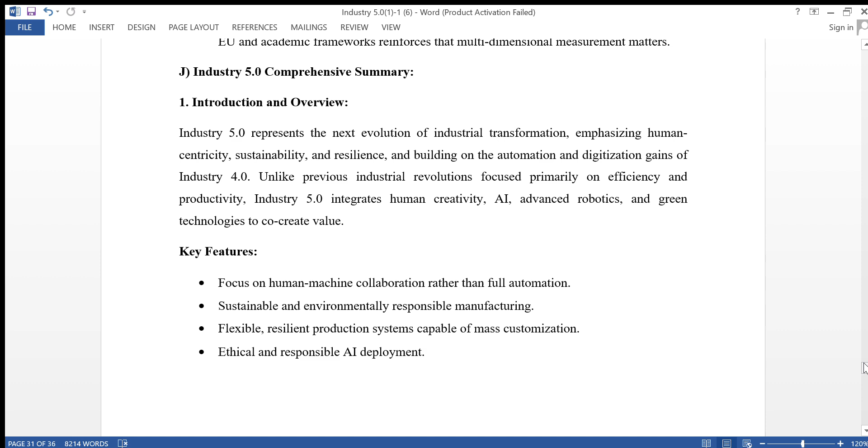Industry 5.0 summary: introduction and overview. Industry 5.0 represents the next evolution of industrial transformation, emphasizing human-centric sustainability and resilience, building on the automation and digitalization gains of Industry 4.0. Unlike previous industrial revolutions focused primarily on efficiency and productivity, Industry 5.0 integrates human creativity, AI, advanced robotics, and green technologies to co-create value. Key features: focus on human-machine collaboration rather than automation alone, sustainable and environmentally responsible manufacturing, flexible and resilient production systems capable of mass customization, and ethical AI deployment.

Evolution path: Industry 1.0, mechanization via steam engine. Industry 2.0, mass production with electricity. Industry 3.0, automation using electronics and IT. Industry 4.0, cyber-physical systems, IoT, and data-driven automation. Industry 5.0, human-centered, sustainable, resilient, and collaborative automation.

Core principle of Industry 5.0: human-centric approach. Humans and machines work as complementary partners. Worker safety, ergonomic design, creativity, and decision making are prioritized.

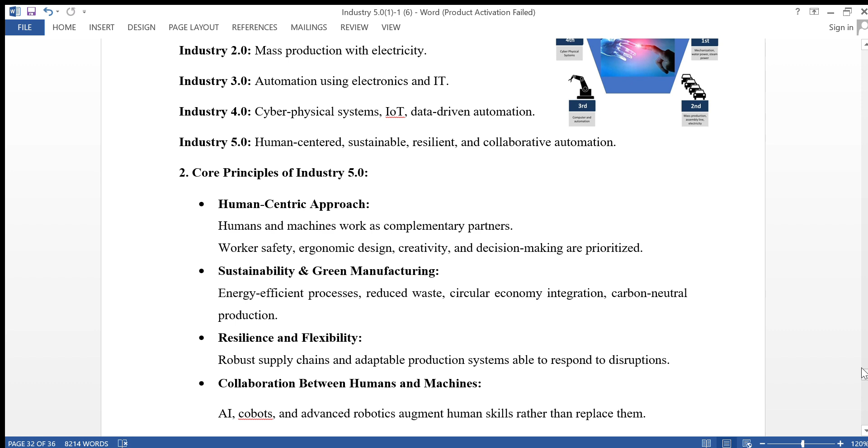Sustainable and green manufacturing: green energy efficient processes, reduced waste, circular economy integration, carbon neutral production, resilience and flexibility, robust supply chains, and adaptable production systems to respond to disruption. Collaboration between humans and machines: AI, cobots, and advanced robotics augment human skills rather than replace them.

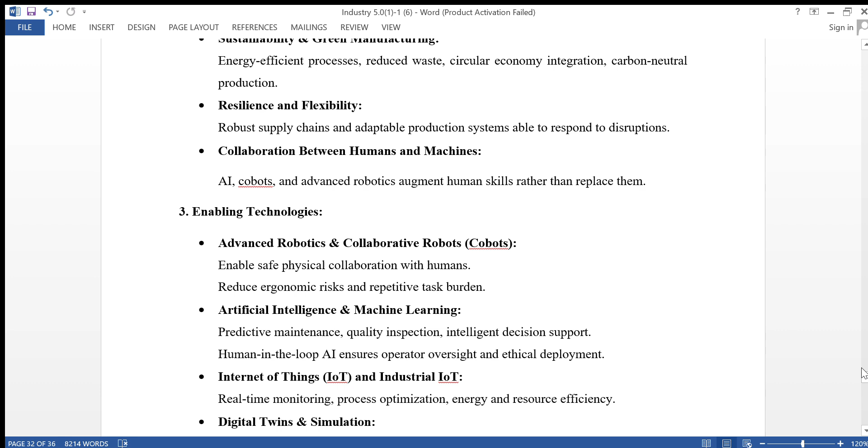Enabling technologies: advanced robotics and collaborative robots enable safe physical collaboration with humans, reducing ergonomic risk and repetitive task burden. Artificial intelligence and machine learning enable predictive maintenance, quality inspection, and intelligent decision support. Human-in-the-loop AI ensures operator oversight and ethical deployment.

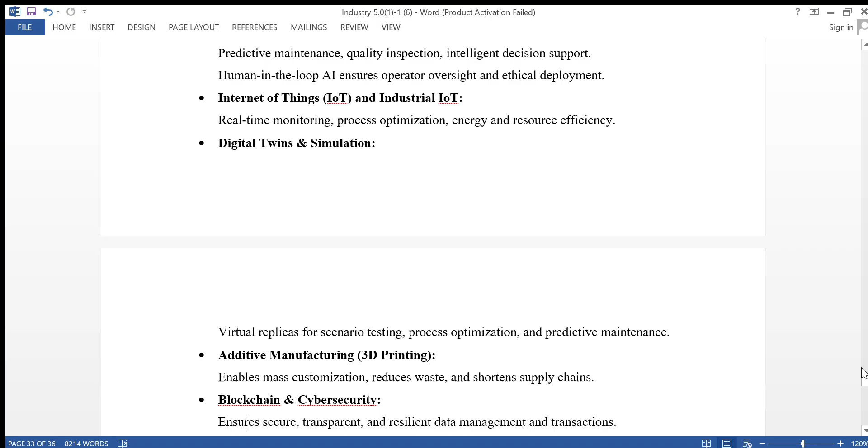Internet of Things and Industrial Internet of Things enable real-time monitoring, process optimization, and energy and resource efficiency. Digital twin simulation provides virtual replicas for scenario testing and process optimization, and predictive maintenance. Additive manufacturing and 3D printing enable mass customization, reduce waste, and shorten supply chains. Blockchain and cybersecurity ensure security, transparency, and resilient data management and transactions.

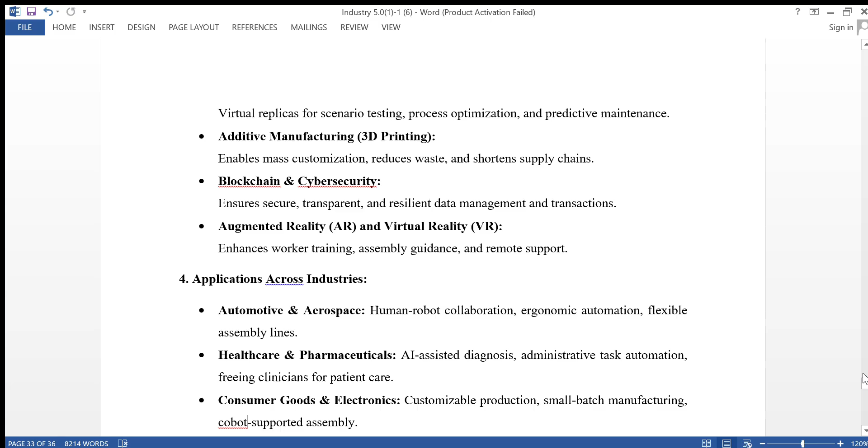Augmented reality and virtual reality enhance worker training, assembly guidance, and remote support. Applications across industries: automotive and aerospace use human-robot collaboration, ergonomic automation, and flexible assembly lines. Healthcare and pharmaceuticals use AI-assisted diagnostics and administrative task automation, freeing clinicians for patient care. Consumer goods and electronics use customization, small batch manufacturing, and cobot-supported assembly.

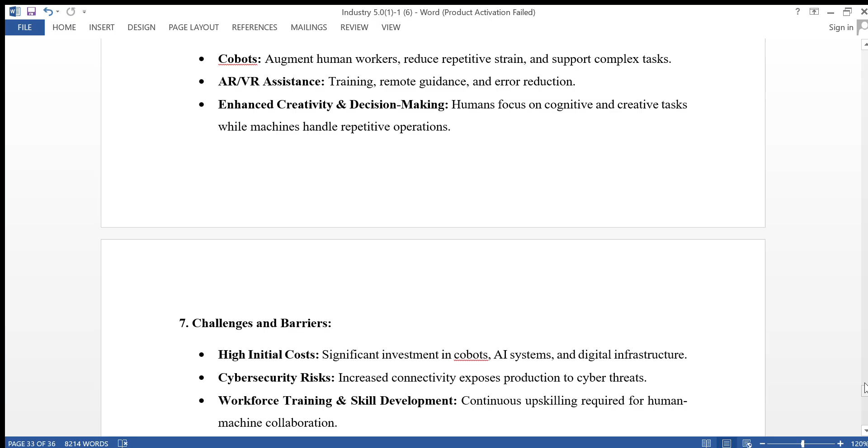Human-machine collaboration: cobots augment human workers, reducing repetitive strain and supporting complex tasks. AR and VR assist training, remote guidance, and error reduction. This enhances creativity and decision making, with humans focused on cognitive, creative tasks while machines handle repetitive operations.

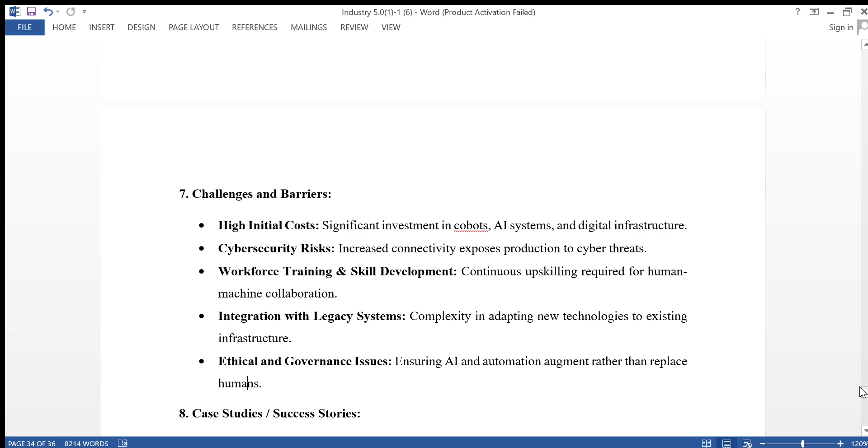Challenges and barriers: high initial cost, requiring significant investment in cobots, AI systems, and digital infrastructure. Cybersecurity risk increases with connectivity, exposing production to cyber threats. Workforce training and skill development require continuous upskilling for human-machine collaboration. Integration with legacy systems adds complexity in adapting new technologies to existing infrastructure. Ethical and governance issues involve ensuring AI and automation augment rather than replace humans.

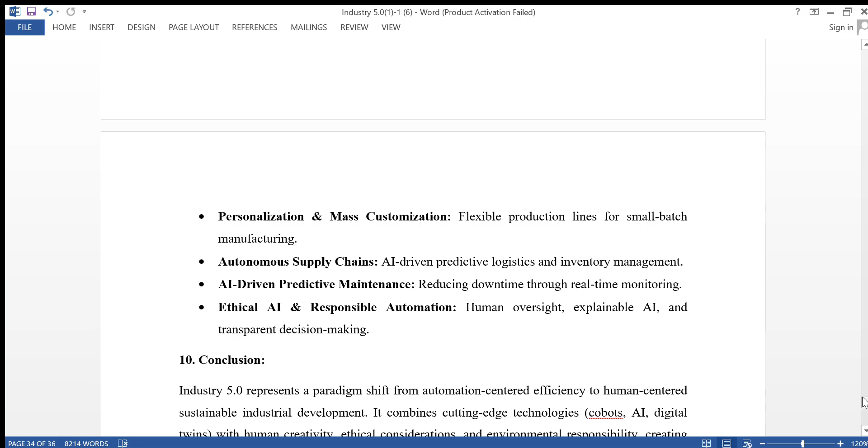Future trends: personalization and mass customization through flexible production lines for small batch manufacturing. Autonomous supply chains with AI-driven predictive logistics and inventory management. AI-driven predictive maintenance reduces downtime through real-time monitoring. Ethical AI and responsible automation ensure human oversight, explainable AI, and transparent decision making.

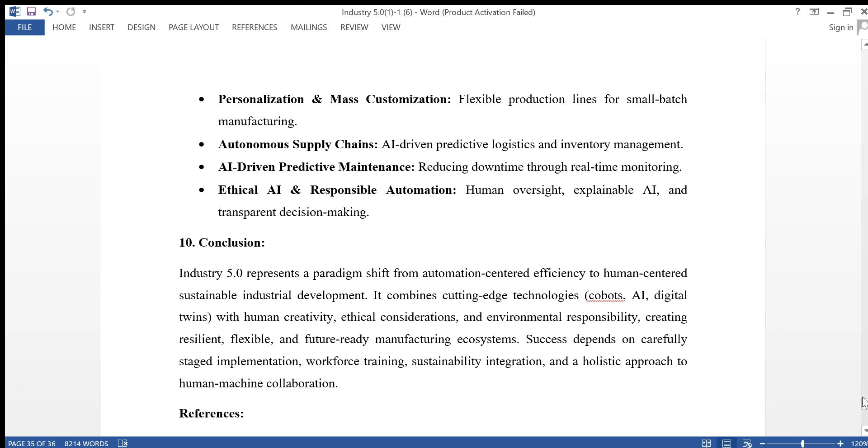Industry 5.0 represents a paradigm shift from automation-centered efficiency to human-centered and sustainable industrial development. It combines cutting-edge technologies, cobots, AI, and digital twins with human creativity, ethical consideration, and environmental responsibility, creating resilient, flexible, and future-ready manufacturing ecosystems. Success depends on carefully staged implementation, workforce training, sustainability integration, and a holistic approach to human-machine collaboration.